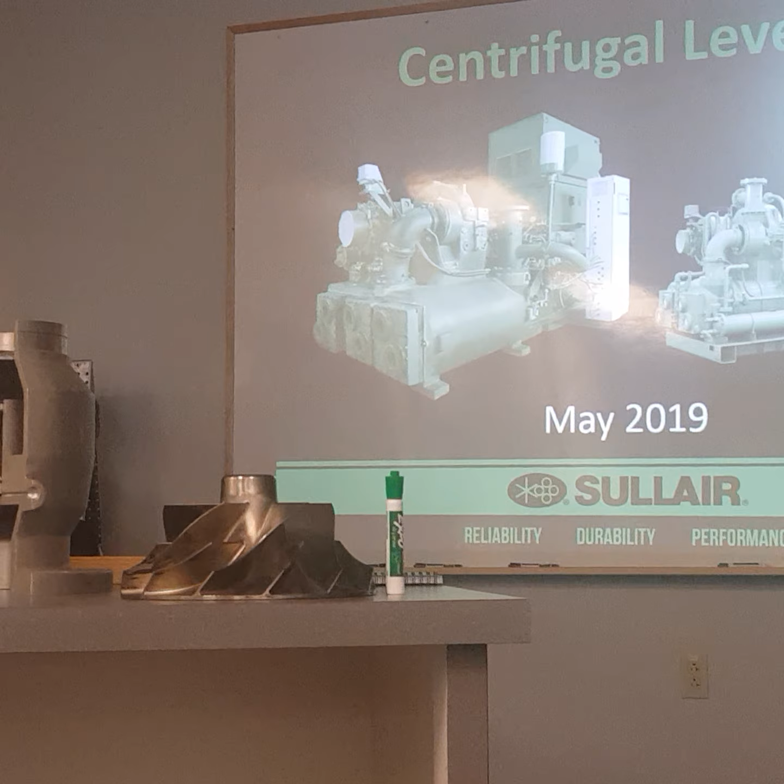Cameron, for years, since the 70s, they manufactured the compressors together throughout the world. 70? In the 70s and 80s, yeah.

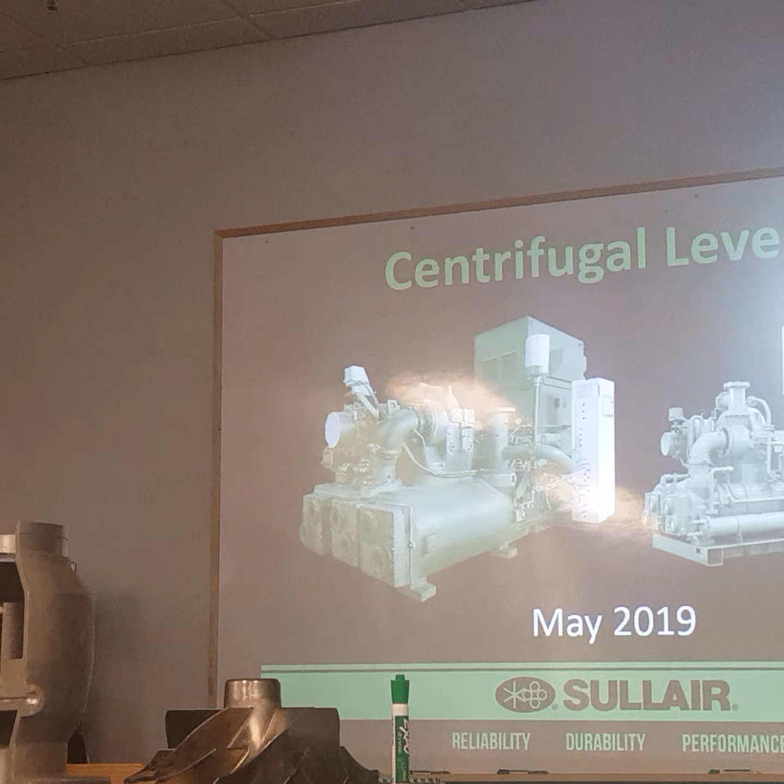So if you look at some of the old Joy and some of the old Cooper Joy machines out in your territory, they'll look familiar because they are the same. They look similar as the IHI, as the Sullair IHI casting. Other than it's been what we call an enhancement. We've upgraded and

we're able to get closer tolerances and better performance out of the TA machines, the MSG, or not the TRE and the TRA. We're able to get a much better performance out of them now compared to years ago when they were first being developed.

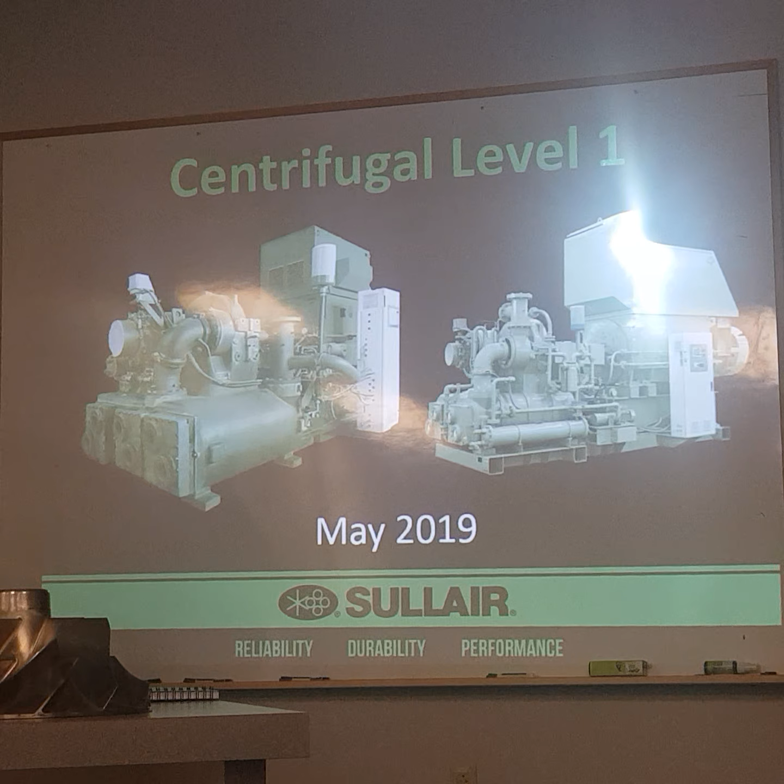That's the benefit. Lo que comenta Bob es que cuando hacemos un compresor centrífugo, la fuerza de ventas de sus compañías me manda a mí una solicitud con las características de la máquina y yo la corro. Y yo corro a través de una base de datos muy grande que tiene la información de todas esas compañías que hemos venido mencionando, para construir la máquina que ustedes van a usar al final del día, ¿no?

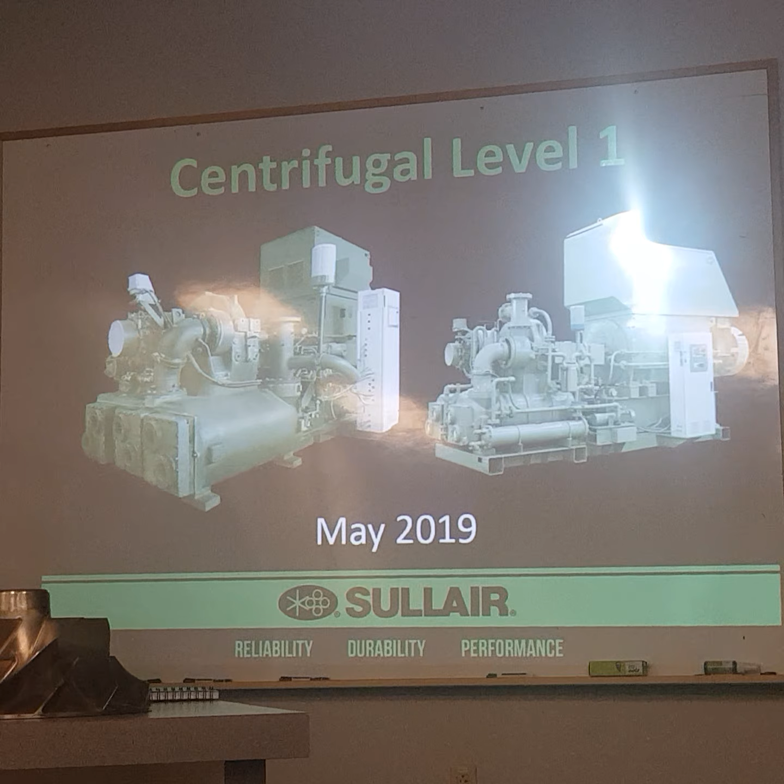So I gave you the IHI Sullair history. We can skip a lot of that right there. The instructor will be Jose, myself, and Alex as we roll through this here.

I have a pretty big background in centrifugals. I've been involved with Cooper and Syntac, Ingersoll Rand, and of course Sullair. La experiencia de Bob en compresores centrífugos es bastante extensa. Viene de Cooper, conoce Ingersoll Rand y ahora está con nosotros en Sullair.

How long have you been here at Sullair? So, now 3 years, 3+ years. Ever since the day they brought the compressors to the United States, I came aboard. Poco más de 3 años con Sullair. At that time I was with Ingersoll Rand, and of course that was during the acquisition, right before Cameron bought Ingersoll Rand. So it was all breaking out at that time right there.

Okay. We went through the safety and housekeeping, emergency electrical safety, lockout, tagout, and all that emergency stuff.

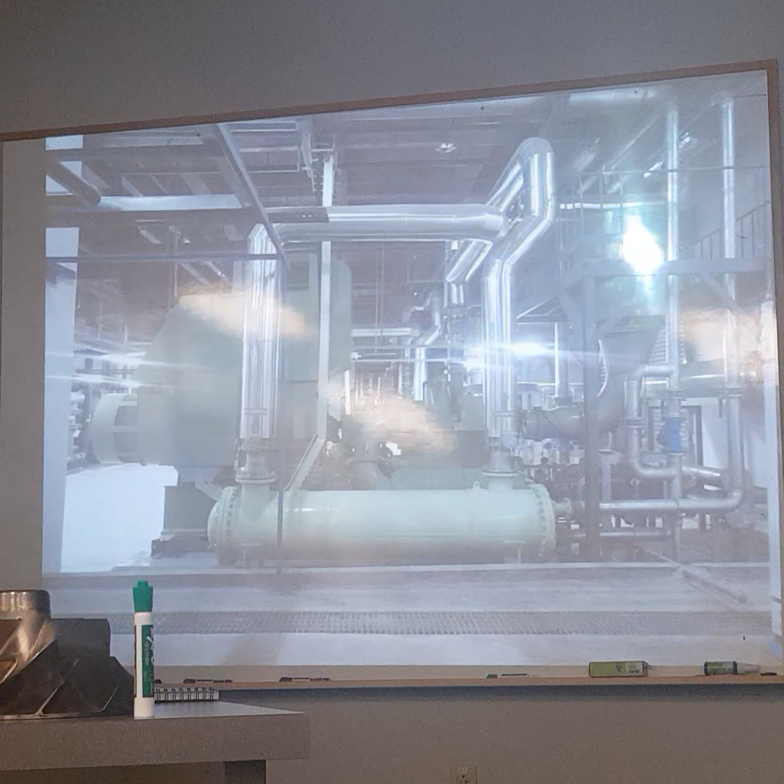This is the T-Series on-site photo album. We'll go through here to different locations. You'll see on this particular model it has the after-coolers. You asked, can they be reconfigured for after-coolers and different coolings? On the bigger models, in the TRX, you have a little bit of playing around - you can position this and switch this around depending on your location. Just the aftercooler, yes.

Para máquinas un poco más grandes ustedes pueden configurar, pueden jugar un poco con el tema del postenfriador, porque viene en este caso suelto, ¿no? Lo podemos acomodar a gusto. Pues sí, a gusto o al espacio donde tengamos que adaptarlo, ¿no?

But our capabilities are bigger than that. If you think we're limited, we aren't. We have what we call an F-Series, and F-Series sounds like a small compressor, but it's actually very large - 1,000 horsepower, 600 horsepower. That's more of an engineered product. An engineered product can be configured to what you were describing: can we have different flows, different flow directions through the coolers and the cooler bundles? El rango que tiene ahora es bastante extenso.

Entonces, dependiendo de la aplicación, dependiendo del uso, los datos de ingeniería nos van a decir qué máquina le corresponde. Cuando se sepa qué datos son, es en el modelo que va a caer. Todos estos datos, al final del día, la información que ustedes tengan del sitio son los datos con los cuales va a trabajar, por ejemplo, Alejandro. Va a correr...

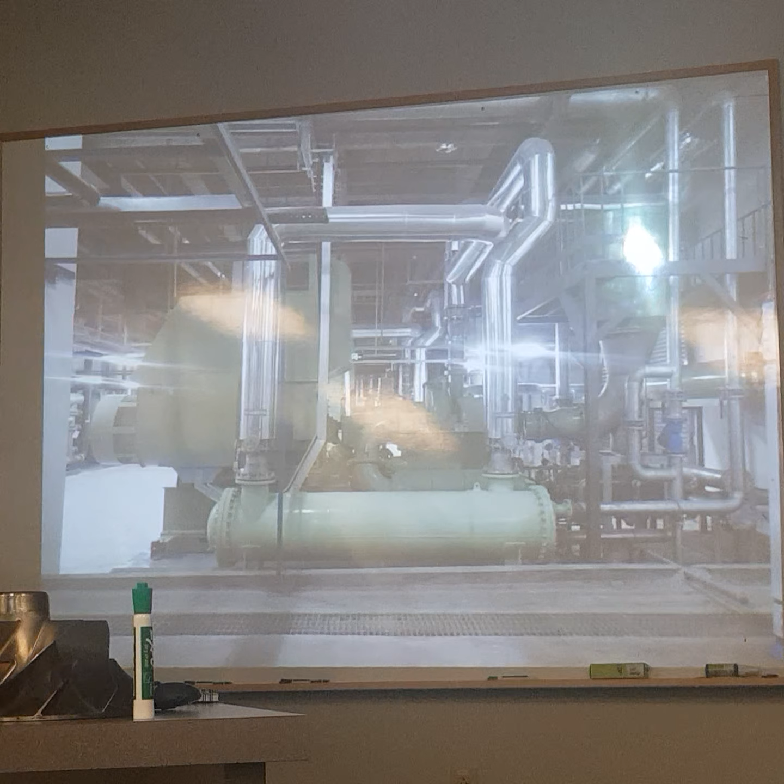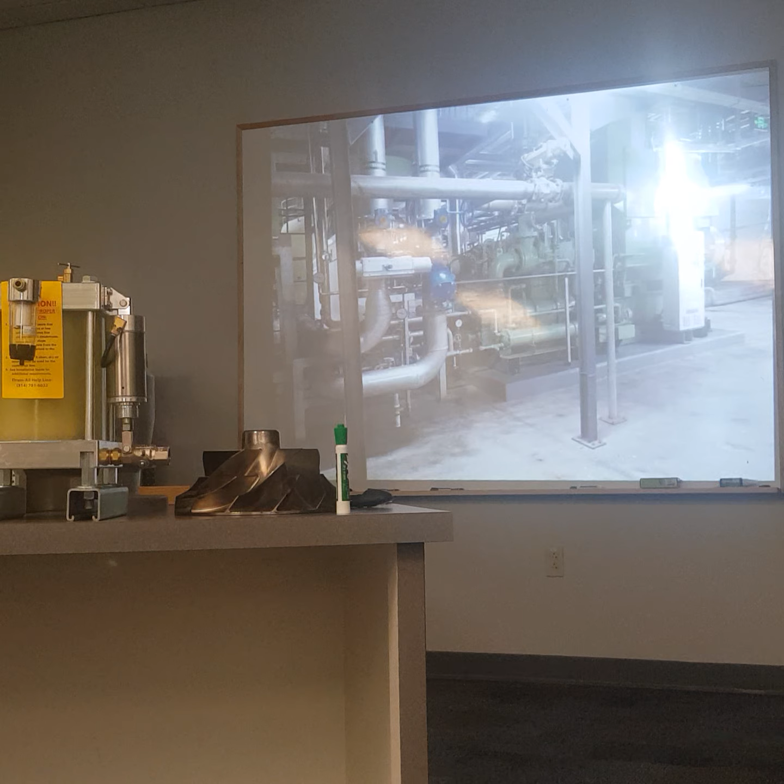What is this? That's the manual shut-off valve. Manual block valve. Oh, and so the auto block valve is before the manual. In case, when the machine shuts down, that automatically shuts off.

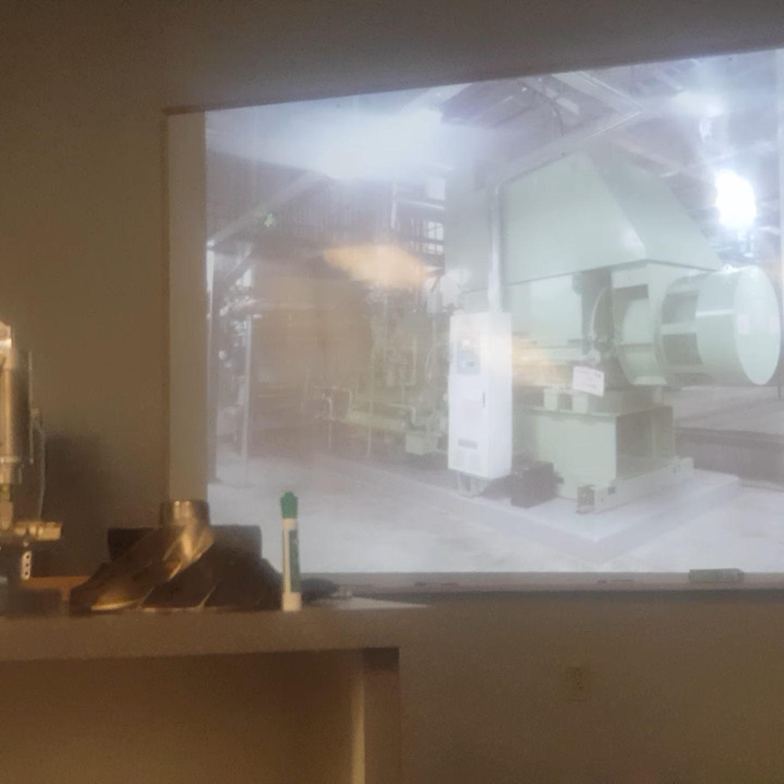He's asking if you do not have a constant pressure control, can you switch a machine in the field or not? You mean like Honda? Yeah. Yes, see. Sí. But with our controllers, and I can't say for Honda, because Honda has that, you already know about the Modbus and all that with Honda, right? Okay, so our controllers, we can run constant pressure, we can run load unload, and we can run on off, constant pressure on off, constant pressure, Z anti-control. It's just selecting what you wanna run. So on our models, not including Hondas, yes, sí.

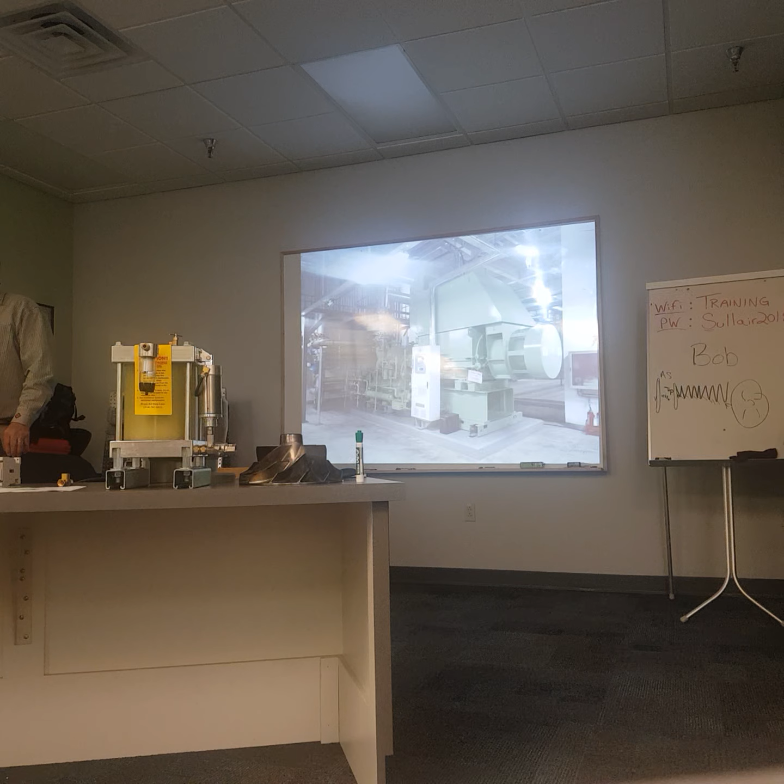Now, that being said, centrifugals like to run constant pressure, modulate, and they like to blow off. You can get into a load-unload compressor, but they don't wanna sit there and load and unload like the rotary screw. You don't wanna do that a lot. So you would rather it be constant pressure Z anti-surge, which means it's gonna go all the way down to the surge point, and then if it's still building up too much air, you can have it programmed so if it overshoots by 4 PSI or 7 PSI, as soon as it hits that set point, it will unload. You can program that in.

What centrifugals like to do is hit that set point. Once it starts raising above that set point, the blow-off valve will start slowly opening and dumping air out, maintaining that pressure. What is the minimum percent the air compressor can turn down with the automatic blow-off valve? It all depends, and that's why we surge the machine. Sometimes we can go 40% down. I've seen really efficient ones get a 40% turn down, or a 30%. 30% is a realistic number, but you'll be surprised that these machines can get almost 40% turn down.